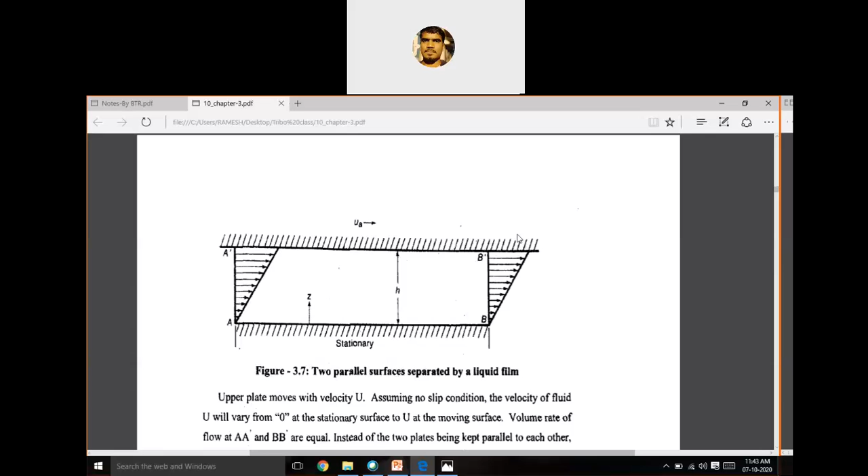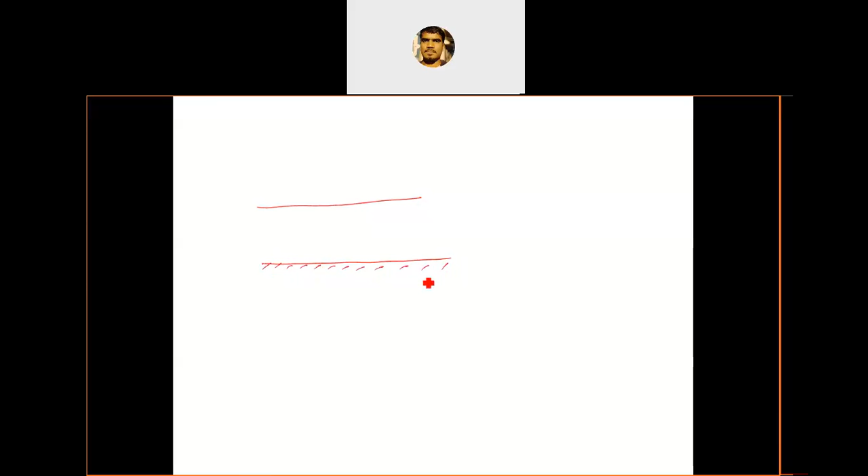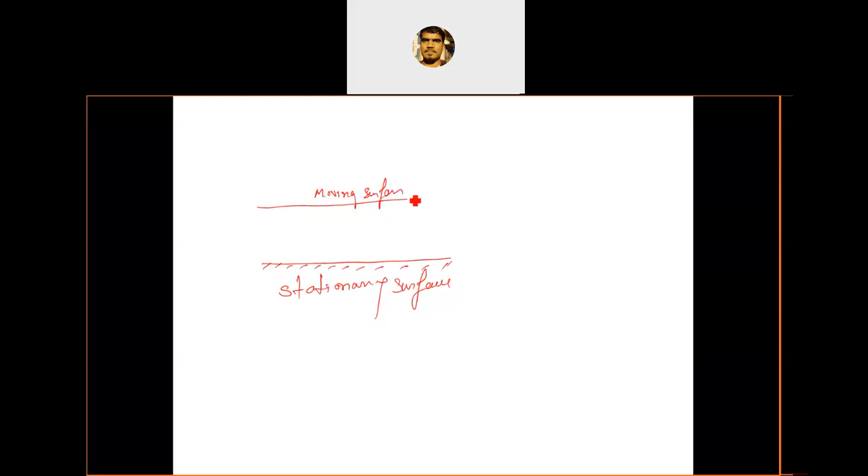So for that, consider a surface. So one surface and another surface, and this is a fixed or stationary surface, and this one is a moving surface or a plate with a velocity of u. Here it is A and A dash, a cross section, and here B and B dash.

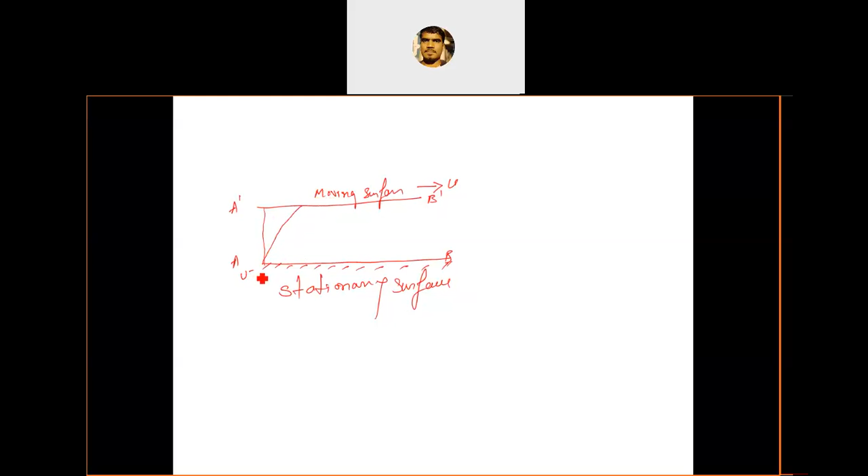Here is how the velocity is distributed along the gap between the moving and stationary surface. The velocity is 0 or minimum at the stationary surface and maximum at the moving surface, because there is perfect adhesion between the fluid and the surfaces. Similarly, the same thing here.

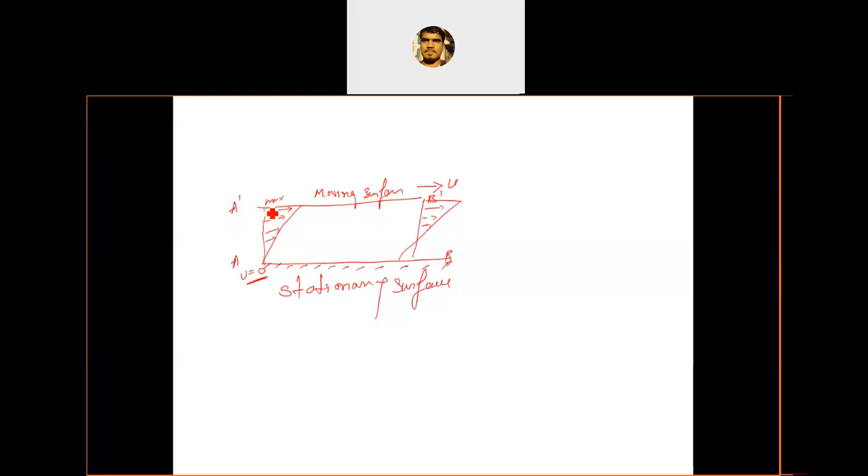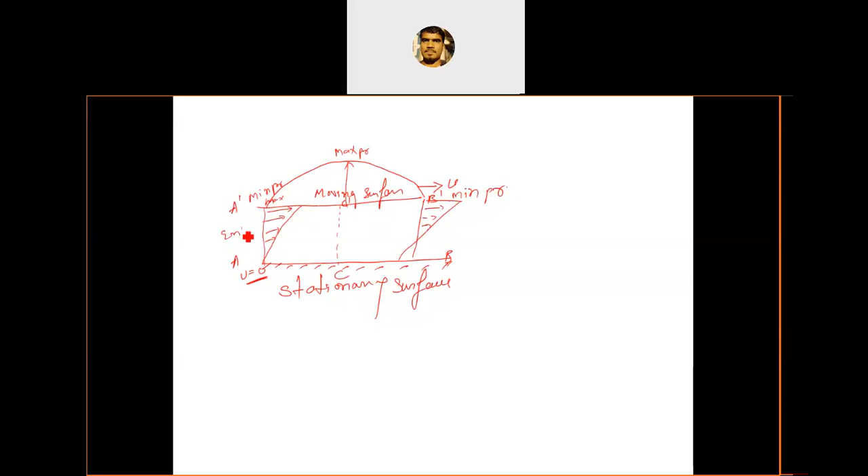And the pressure distribution is like this. Let us consider this as C dash. Here the pressure is maximum, and at the entry minimum pressure, and at the exit it is also minimum pressure. This is the entry and exit. So here it is minimum pressure and minimum pressure, but here there is a maximum pressure. This is how the pressure is distributed. It is parabolic.

Clear? In this case one is a moving plate and the other one is stationary. And of course this gap is completely filled by a fluid film with a viscosity mu.

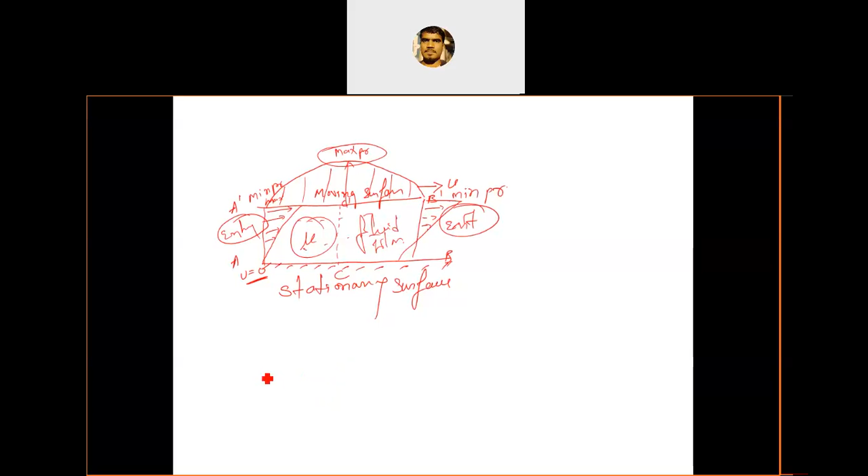Similarly, flow through non-parallel plates. If it is non-parallel, this is a stationary plate, or a plane thrust bearing, whatever it may be. So the next condition is if we consider a taper surface, that is the taper or fixed shoe. We already discussed what is meant by fixed shoes, pivoted shoes, and plane surfaces. If we consider a taper surface, in the fixed shoe the taper angle is fixed. Here the pressure development as well as the velocity distribution also varies, as you can observe here.

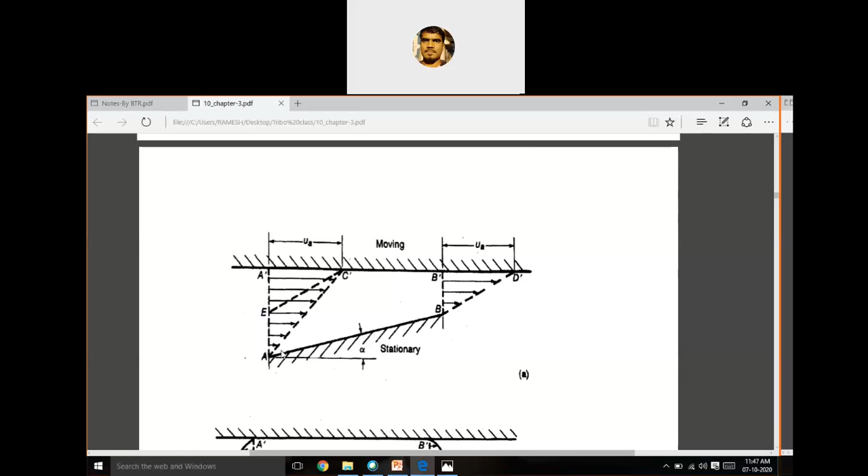Yes, this is the taper surface. Alpha is a stationary taper angle, and it is fixed. Here the fluid will flow between the inclined surfaces - that is the taper surface. This is how the velocity varies.

First consider A dash, B dash is the cross section. Here the velocity is more because the cross section goes on decreasing, so it increases the velocity, and here the velocity is less. Actually this is the velocity, but originally this is what we expect. But practically, at C dash the velocity is only small, so there is a negative velocity.

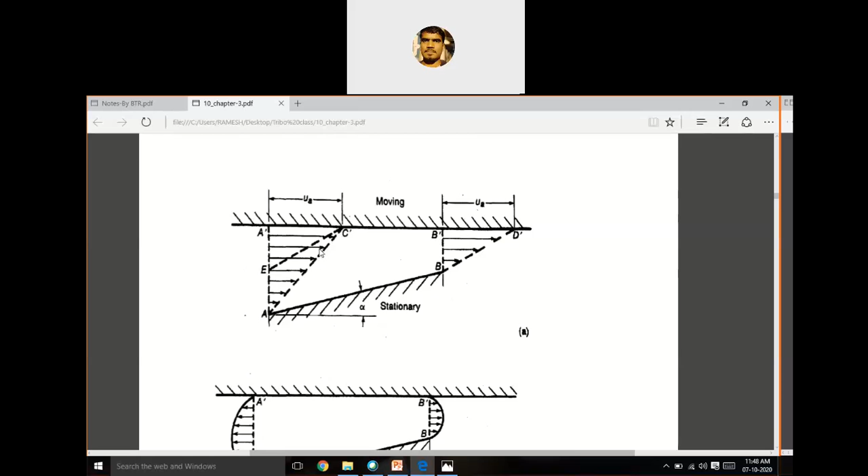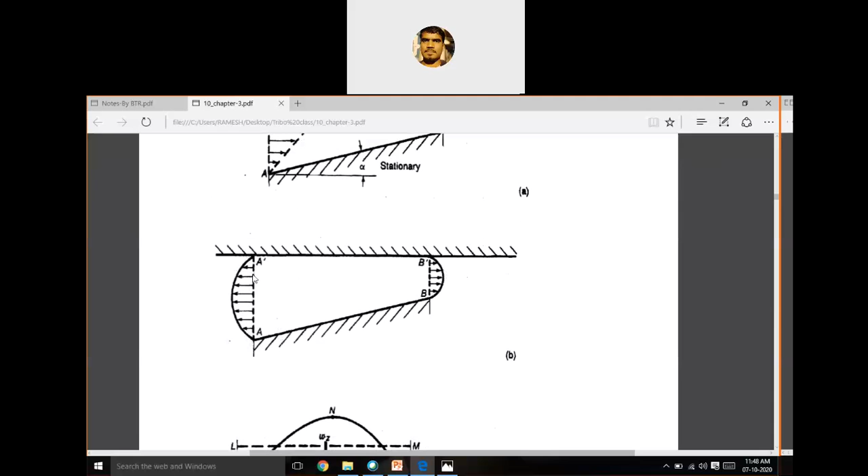And pressure - this is the pressure distribution, and this is load carrying, so exactly at the center there is load carrying, so pressure is more. You can see this is the negative velocity and this is the positive velocity, and here it is exactly the same velocity. This is the pressure, so along the thickness of the fluid film, this is how the pressure is.

Here the velocity increases and decreases - just take an example, consider water flowing in a pipe. The pipe is having the same cross section, but once we disturb the cross section by holding that pipe, it will change its velocity, correct?

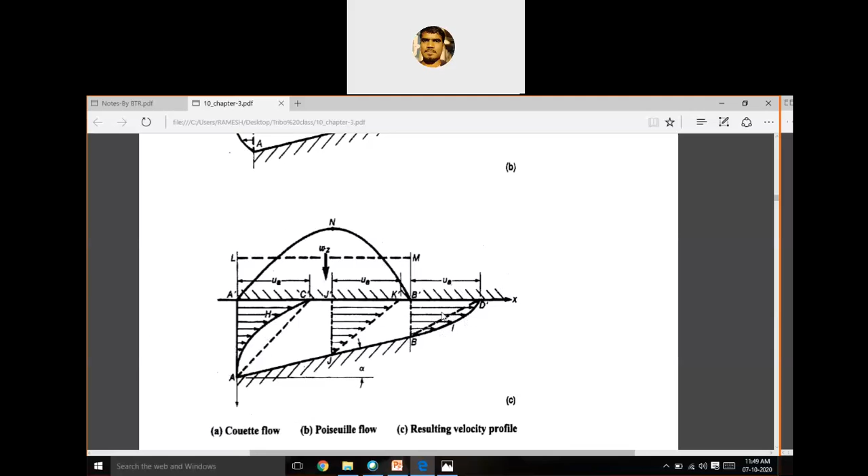You can observe that if you change the cross section by holding or pressing the pipe, the velocity of that water flow changes - it will increase because you change the cross section. Here also the same concept: the fluid is flowing and we change the cross section so that it will develop pressure. The velocity also changes, but this does not happen with the stationary plate.

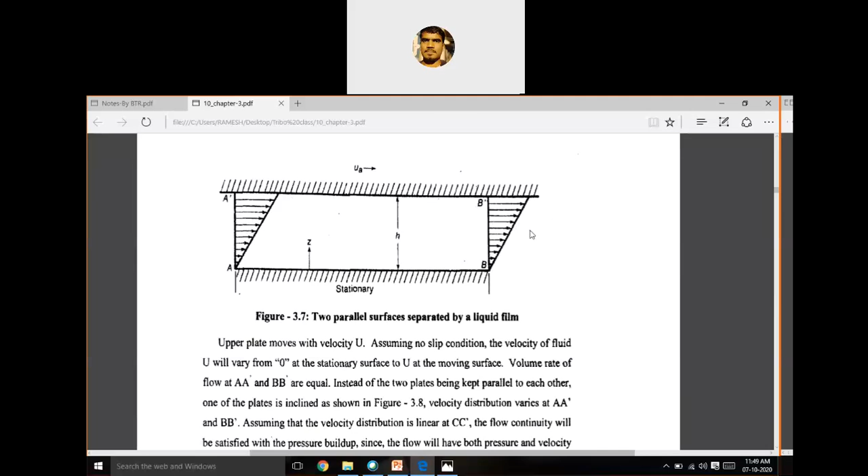Here it is a stationary plate, both parallel, so the velocity at the entry is equal to the velocity at the exit. But here the velocity at the entry and exit changes - it is more at the exit and less at the entry, because there is more cross sectional area to enter and less area to exit, so velocity increases.

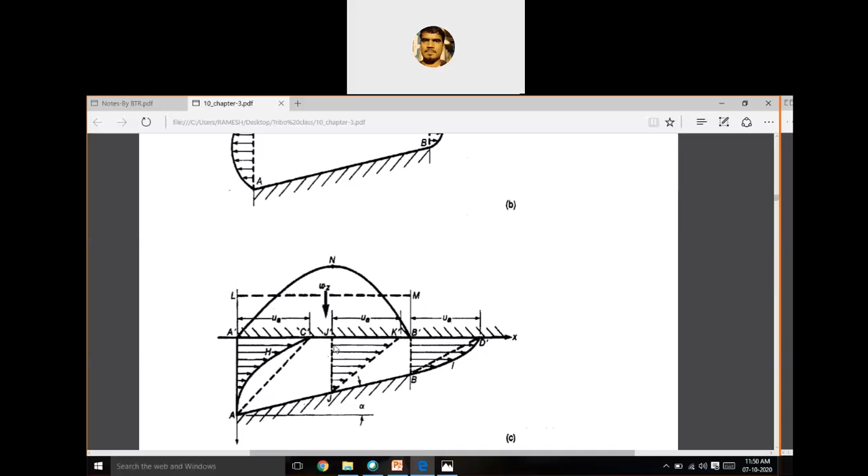This also affects the pressure. Because of this reduction in area, it creates a back pressure - there is a rush in the fluid and it creates back pressure, and this back pressure will sustain or be able to develop the pressure, and that pressure will carry the load.

The development of this pressure is constant, meaning it is fixed - it does not change with respect to the load. Whatever the load may be, it delivers the same pressure.

Consider non-parallel plates as shown in the figure, in which one is stationary while the other is moving with constant velocity in the direction shown, left to right, assuming the width to be large compared to the clearance. Flow perpendicular to the plate can be neglected. The volume of lubricant dragged into the space between the surfaces at A dash is greater than the volume of lubricant discharged from the space at B dash, assuming the fluid to be incompressible - this is an important assumption. The volume of oil carried into the space must equal the volume discharged from the space.

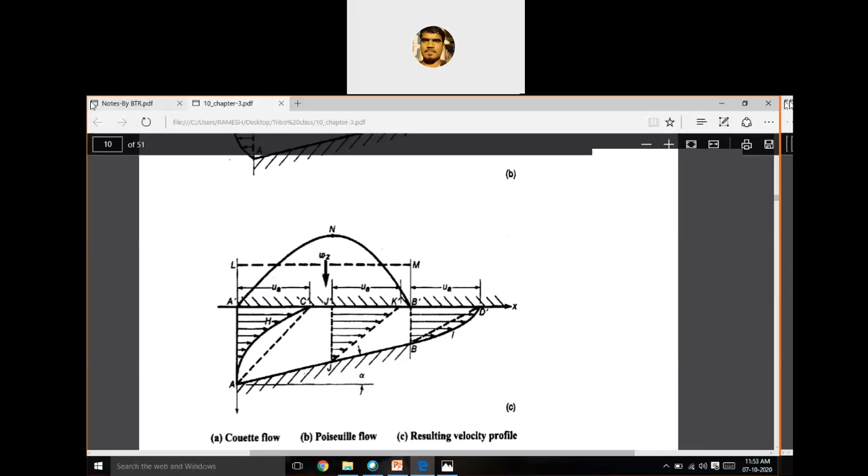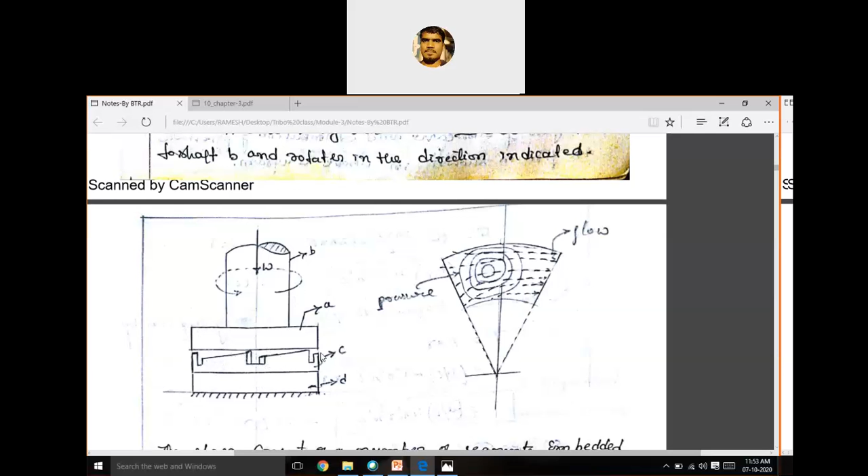So this is how the pressure is developed. This is a fixed shoe - of course it's a fixed shoe, meaning here the shoe taper angle is fixed. This is how pressure is developed.

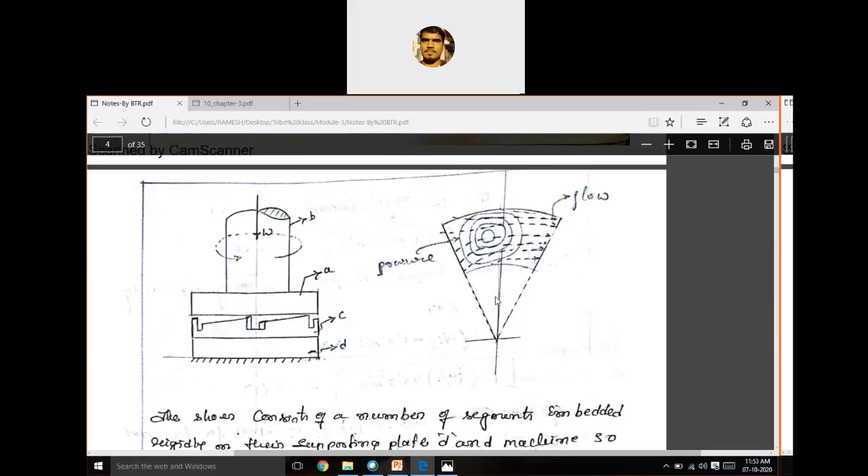Is it clear? Understood?

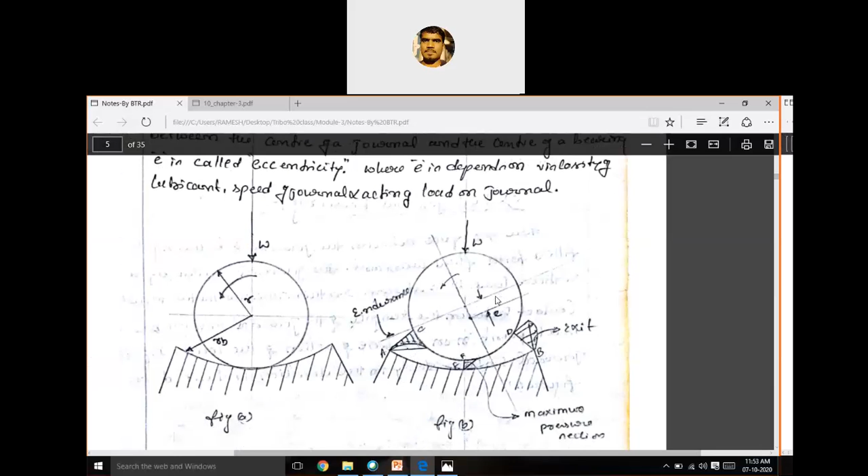Yes, sir. So next we move on to how the pressure is developed in a partial journal bearing - how in the case of a partial journal bearing the pressure is developed.

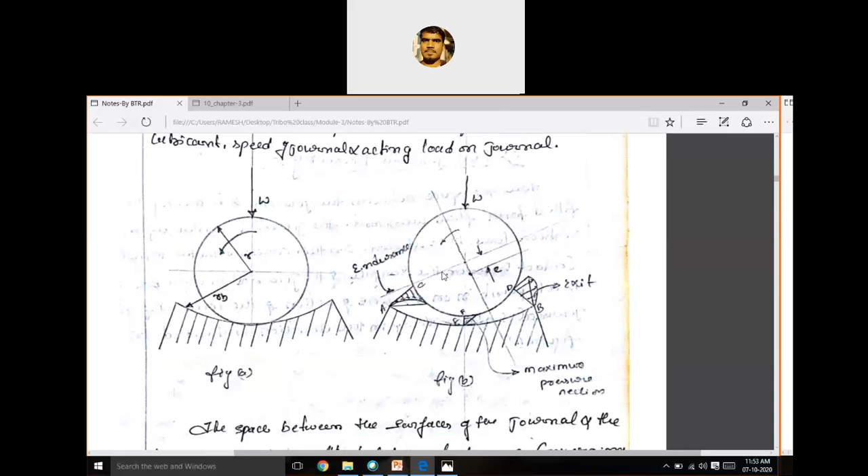This you can observe here. This is the partial journal bearing - the journal, and this is the bearing surface, which is always in contact with the journal for less than 180 degrees. That's why it is called a partial journal bearing.

Here you can see small r is the radius of the journal, RB is the radius of the bearing, W is the vertical load applied on the journal, and E is the eccentricity between the journal center point and the bearing center point.

It is always E. Here at the entry A to C and discharge or exit B to D, and in between E to F cross section is where the maximum pressure is developed. At the entry the velocity is less - there is a negative velocity - and here the velocity is more, this is a positive velocity region, meaning there is an excess of velocity at the exit. At the entry there is less velocity, there is a rush in the fluid because the cross section decreases. When the cross section decreases, obviously velocity as well as pressure increases.

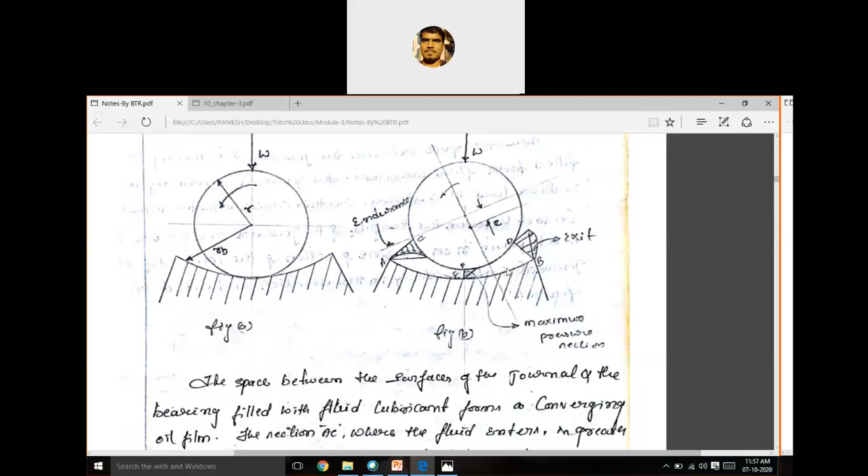At the entry and exit the pressure is always constant, which is atmospheric pressure. So this is how pressure is developed in the partial journal bearing.

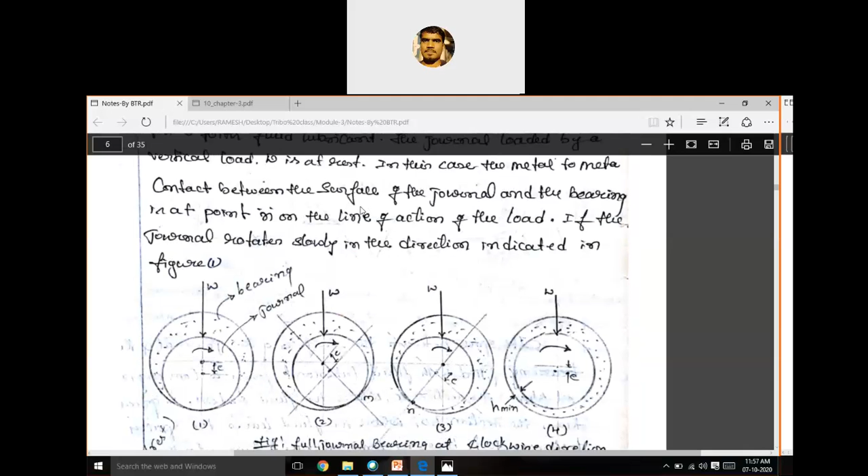Similarly, let's come to the full journal bearing - how pressure is developed in the full journal bearing.

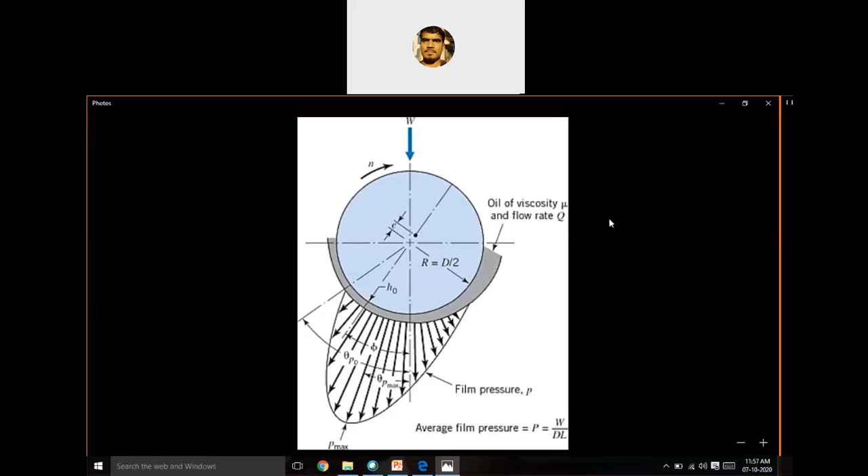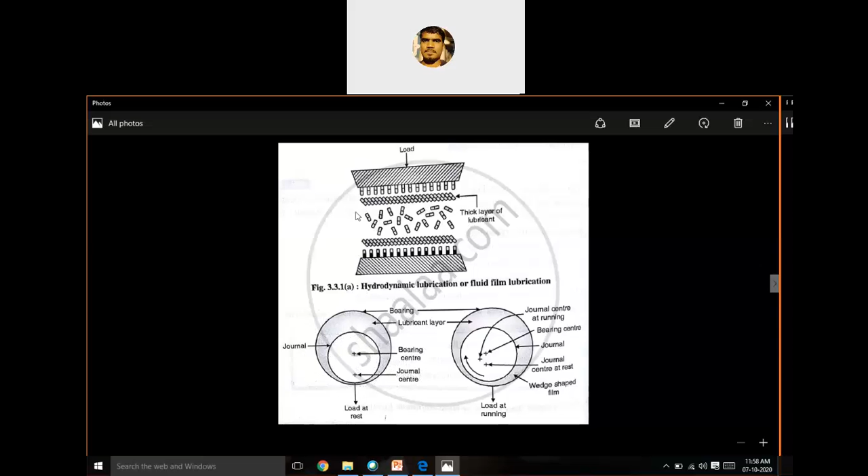Here you can see this is a full journal bearing, hydrodynamic bearing. This is the bearing surface, this is the journal center, and this is the bearing center. An eccentric load is applied, and the two surfaces are separated by a thick absorbed layer, and this is how pressure is developed in the full journal hydrodynamic bearing.

Hydrodynamic means hydro means fluid, dynamic means it will spontaneously generate the pressure. Static means it needs an external source of pressure.

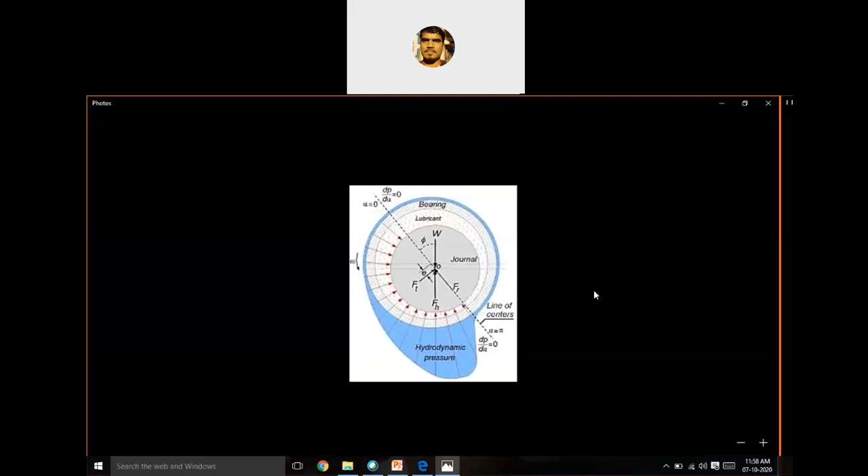In this case, there is metal to metal contact between the journal surface and bearing surface at a point. Here this is the point where there is direct metal to metal contact between the journal and bearing surface.

Here you can see the gap is completely filled by a fluid film, and this is the bearing surface and journal. Because of the load at rest, there is direct contact, and the eccentricity is maximum - there is direct contact.

So here the journal in full journal bearing rotates in the clockwise direction - here we consider a clockwise direction.

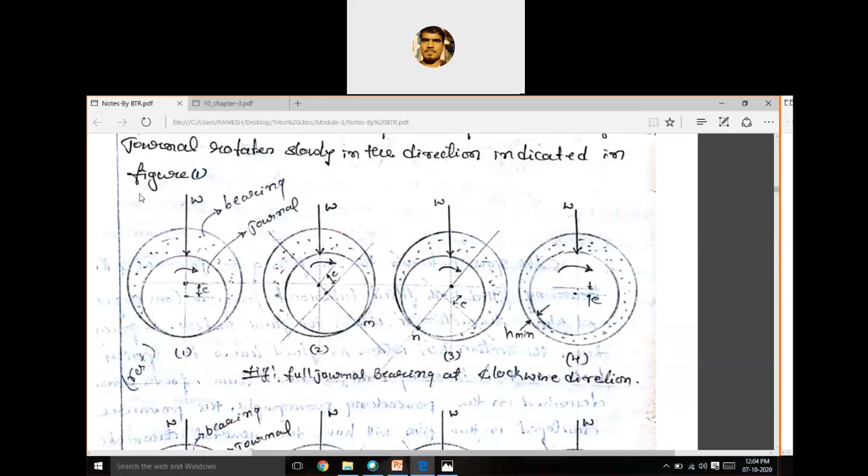Now the eccentricity will reduce to minimum, not zero. In the first figure it is maximum E, and in the fourth figure E is very less, because there is a gap or small film between the two surfaces, that is H minimum. This mechanism happens only for clockwise direction.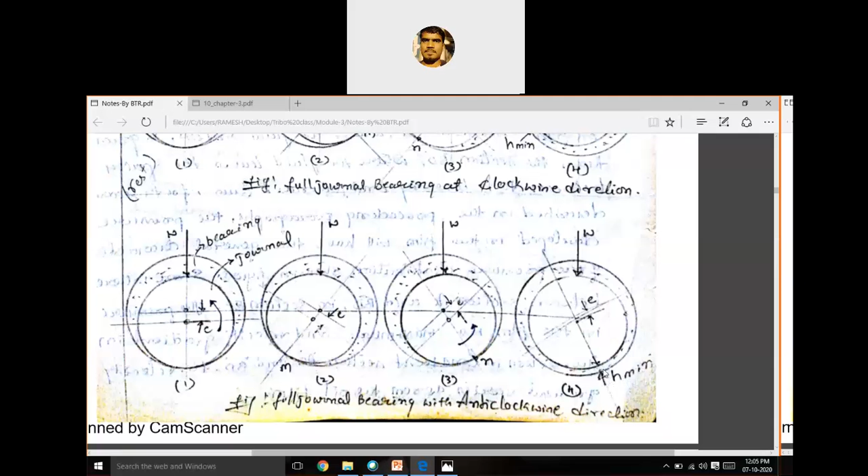For the anti-clockwise case, at rest there is direct contact where E is maximum. As the journal starts rotating slowly, it shifts to a new position, rolls up, called M, on the left side. Then as speed increases, it shifts from M to N to the right side, opposite to before. Once sufficient pressure develops because of the converging and diverging portions, it separates and becomes H minimum, on the right side here, left side for clockwise, right side for anti-clockwise direction.

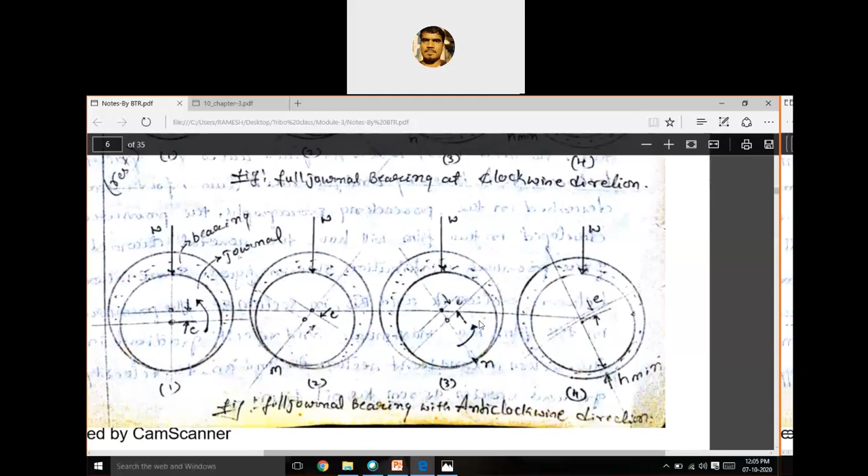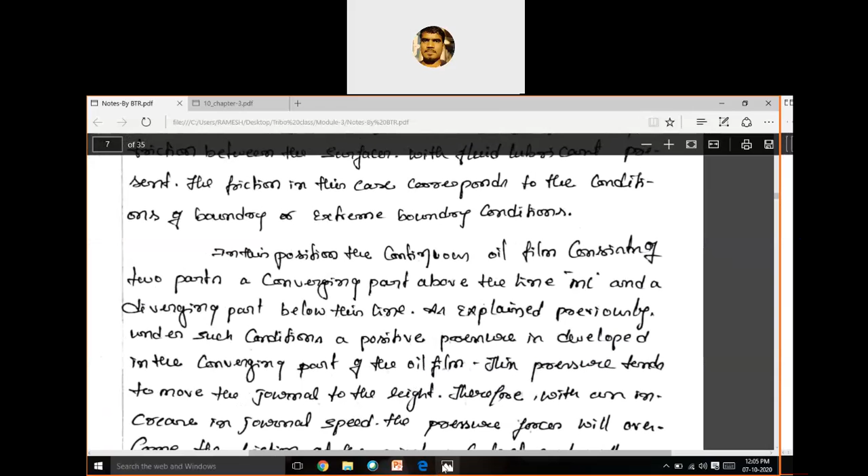This is how the pressure is developed in a fluid film. First the rest condition, then it starts to rotate, then it shifts back. And here you observe that...

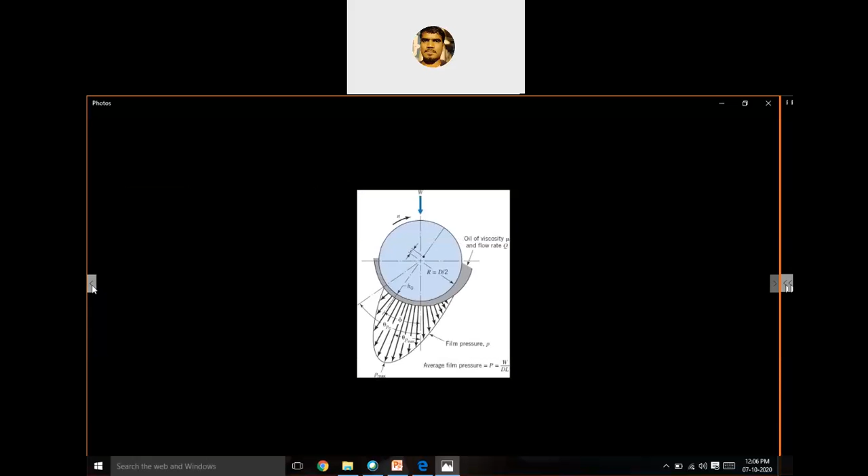The pressure is always maximum here, in the converging part and diverging part. In the converging part, pressure is positive, meaning the cross section decreases and pressure increases. So the pressure slowly increases, but in the diverging part, the cross section increases and the pressure goes on decreasing. So here negative pressure and here positive pressure, because pressure increasing is positive, and pressure decreasing is negative.

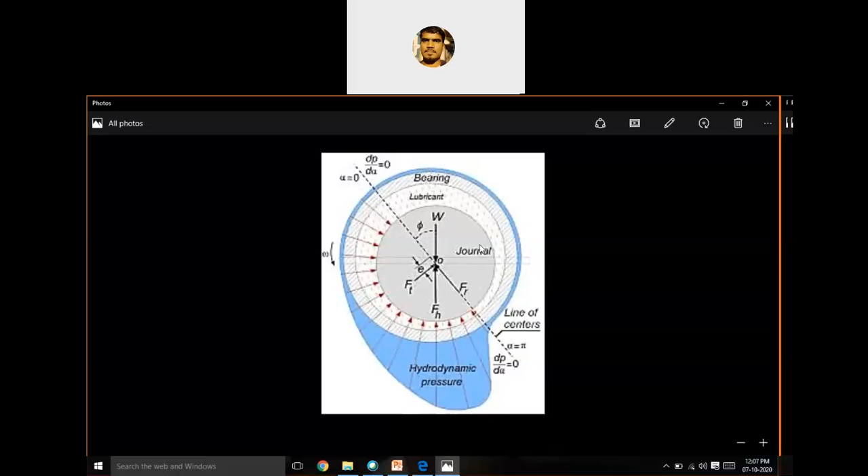In the converging part it's positive, in the diverging part it's negative. Because of this dynamic action, it will sustain or carry whatever load W is acting on the journal surface. Is it clear? Here also you can observe that the oil inlet continuously supplies oil for this dynamic action. This is at rest, this is about to start, and this is during running, when the speed is maximum.

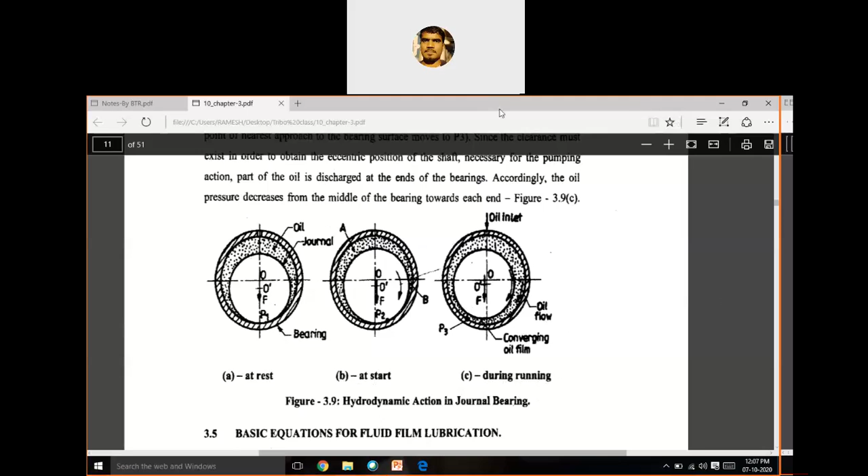In the examination, you may get a question on pressure development in the full journal, partial journal, or parallel plates or taper plates. First you have to write a neat figure, then explain how the pressure is developed with respect to the velocity.

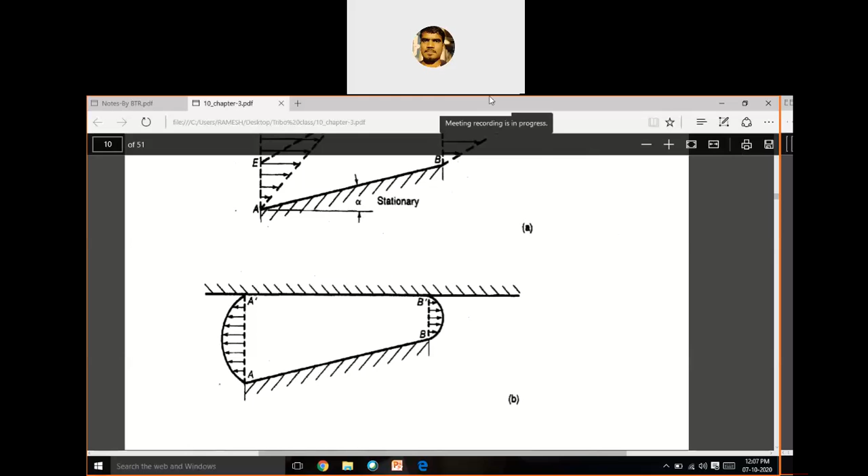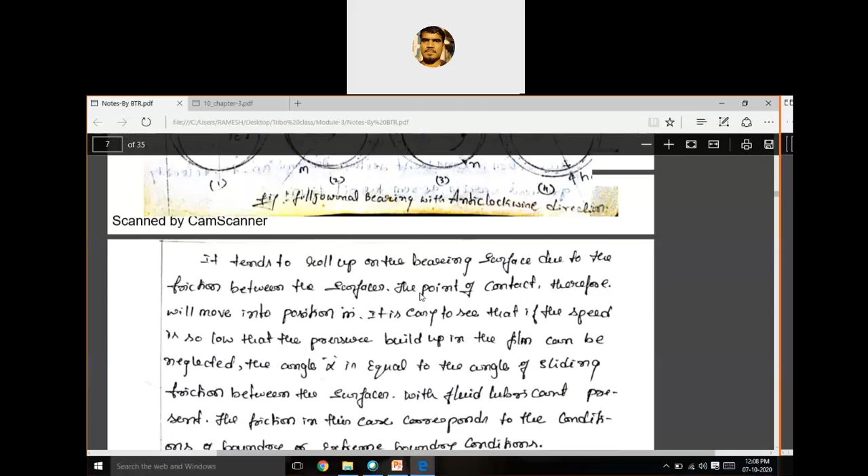Here I have written the notes. Yes, this is the theory part, these are the figures. You have to write them neatly. Then here there is an explanation regarding that.